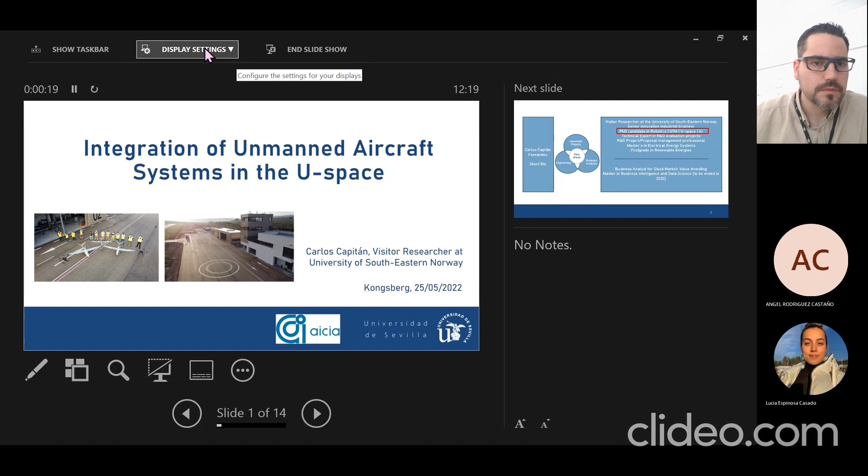As I told before, I'm Carlos Capitan. Right now I'm visitor researcher at the University of Southeastern Norway, a place in Kongsberg. I worked at AICIA, a technological center associated to the engineering school of the University of Seville in Spain.

As a short biography of myself, I have been working more than 10 years in the development of innovation projects in different fields of industry, some renewable energies, electrical matter, also in robotic UTM systems. I have done some technical roles and also management roles in my experience, my background, and the topic of today is the PhD, the doctorate that I have been doing in my last 4 years.

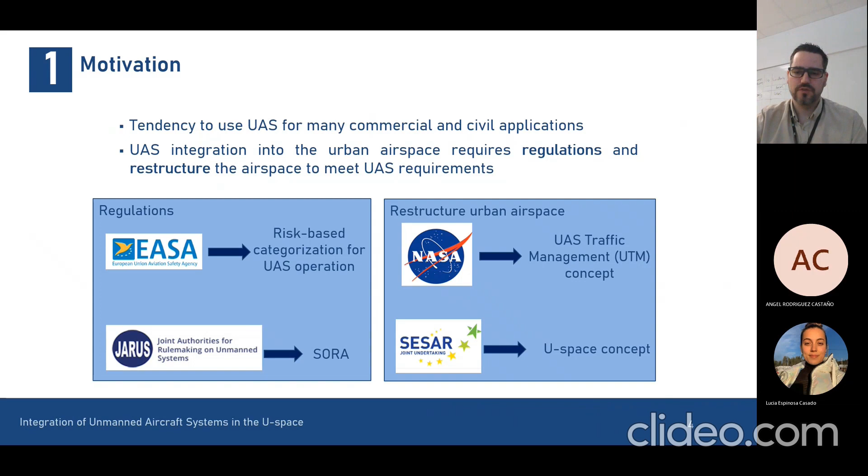Speaking about regulatory framework for UAS as objective, we had the task of studying and applying the regulatory framework coming from the European Commission to get approval for UAS flying in the U-Space. This research was made in the context of the Multidrone project, a European funded project, Horizon 2020.

And the work that we achieved in this research was to make an evaluation of the risk level of an operation - an aerial cinematographic operation to be conducted with autonomous small UAVs.

So we applied the whole process of the SORA methodology that is defined by EASA, by JARUS, as I told before. Here we can see some pictures about the whole process that you have to do in order to accomplish the assessment and get the approval at the end to start flying in the U-space.

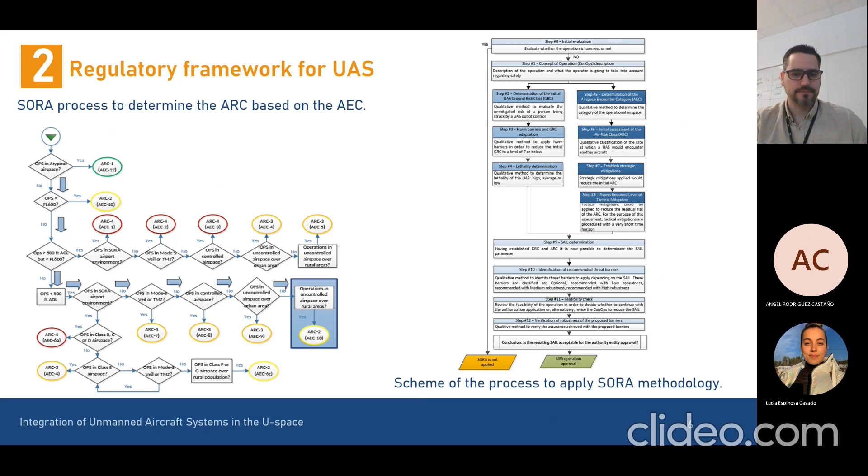The second pillar of our research is based on the development - the objective is building a framework for unmanned aerial traffic management in the context of U-Space. This research was funded and aligned with the European project Horizon 2020 GAUSS.

That it is funded, but it was funded with GSA. The work that we achieved in this research was to develop an open source framework based on ROS as underlying middleware for a UTM system architecture.

And there we developed a UTM with in-flight U-space based services. In-flight services are the services that you need when the drones are already flying.

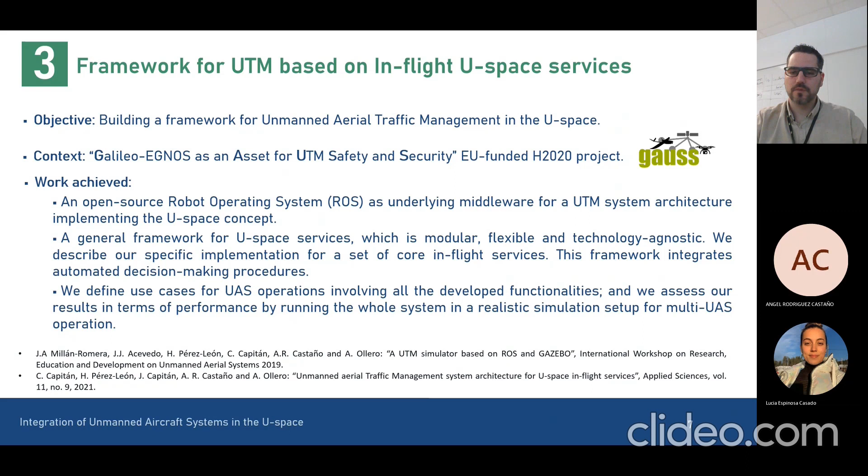Once we developed this software architecture, we tested it by defining some use cases with the UAS operation and running simulations in a realistic environment, one setup for multi-UAS operation.

Here we can see a scheme of the architecture of the U-space. In green are the services we developed: tracking, monitoring, emergency management, and tactical deconfliction. These three blocks are the software modules needed to run the UTM system as a whole.

Outside the UTM system, we have more stakeholders that are part of the U-space ecosystem, such as the drone operator, the drone itself, authorities, and so on. There's also a link to the open source repository where all our software development is released.

At the right of this slide, taking into account a report from Eurocontrol, we show how the overall implementation level in Europe stands for every U-space based service. As you can see, our UTM system addresses services like tracking, monitoring, emergency management, and tactical deconfliction, which have a big gap to be improved in terms of implementation around Europe.

In this slide, we are going to show a video about our UTM architecture system. At the right, you can see the functionality that our UTM system covers.

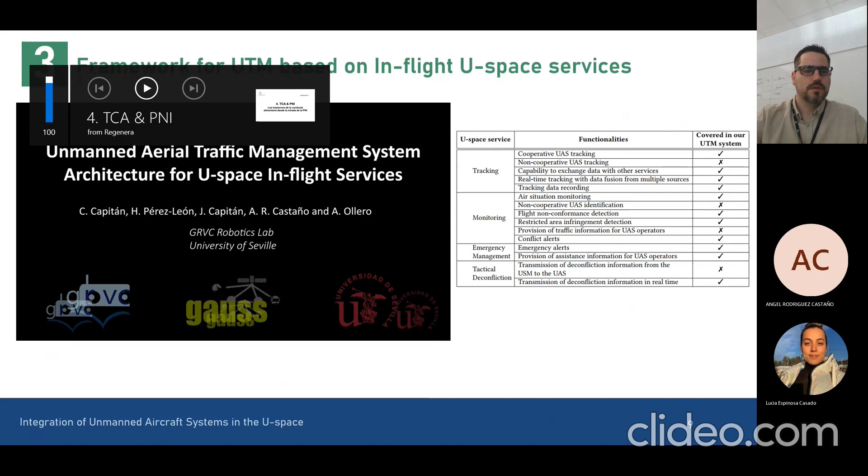Here we can see that we are developing a UTM system to integrate fixed wing and rotary wing UAS in the same airspace. We consider the operational volume, as well as the trajectory for UAS, considering position and time. We develop in-flight U-space based services and have automated decision making during real-time threat management and conflict resolution. We define two use cases that we are going to see now.

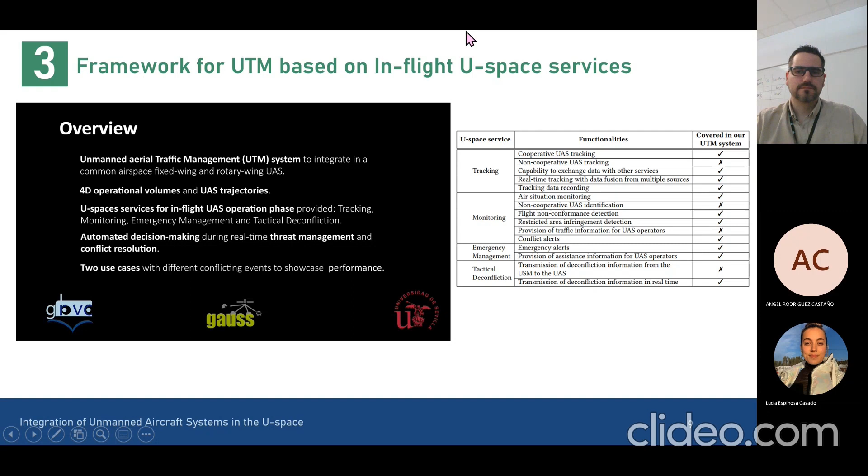The first use case involves one fixed wing drone doing a power line inspection operation, and one multi-rotor drone doing a precision agriculture operation.

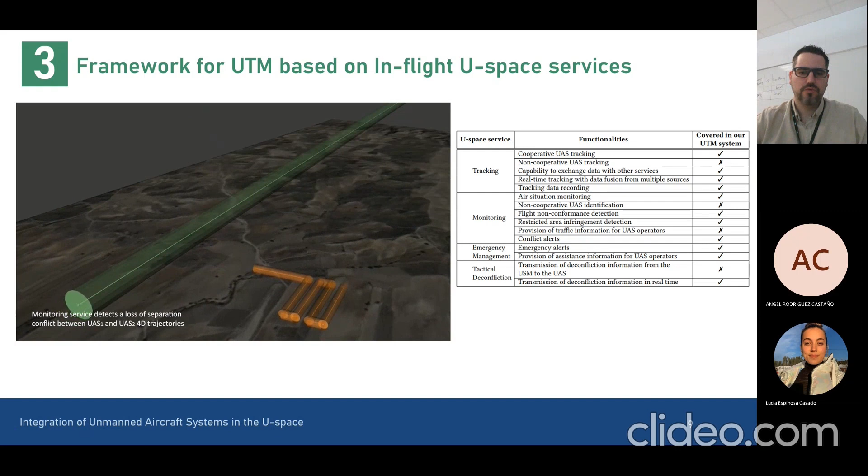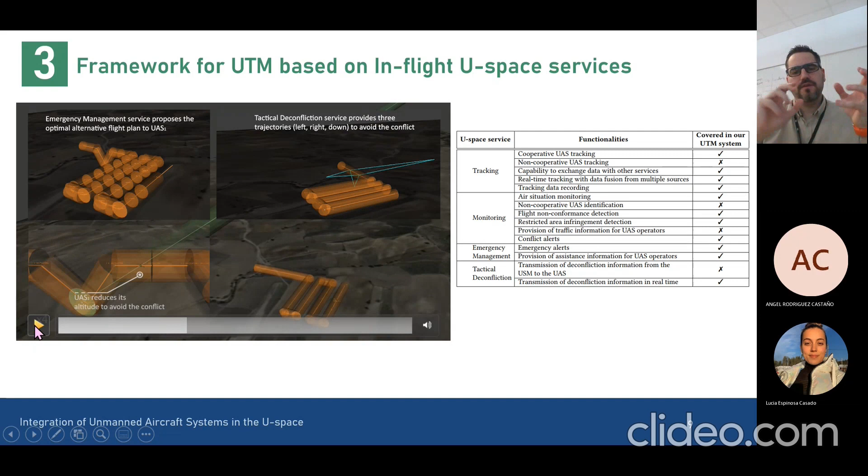UAS2 started on time, but UAS1 delayed its operation start. The monitoring service detects a loss of separation between the two drones. The tactical deconfliction service proposes different options to solve this conflict, proposing that the multi-rotor change its trajectory, because by the rules of the airspace the fixed wing drone has priority to not change trajectory, since the maneuverability of a multi-rotor is easier than a fixed wing drone.

The emergency management service decides what is the most optimal solution to solve this problem. We can see that the multi-rotor avoids the conflict like this.

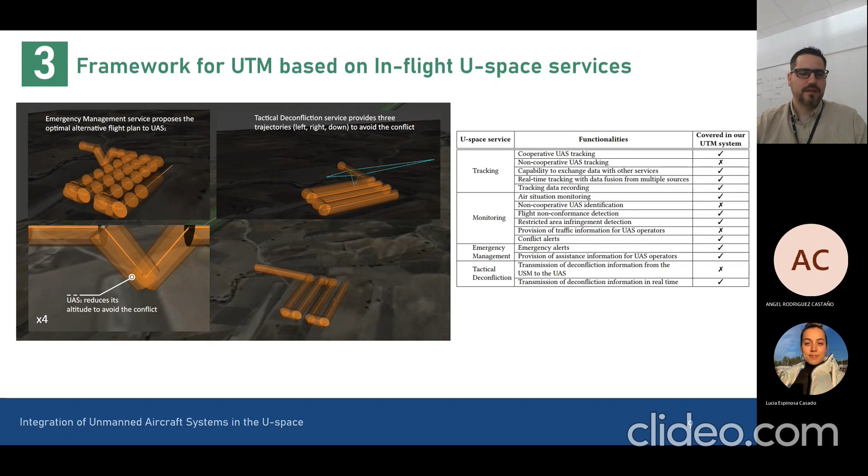The second use case we consider is managing a jamming attack causing a geofence conflict. In this case, we also have two drones: one multi-rotor doing a forest surveillance operation, and another multi-rotor doing a wind turbine inspection operation.

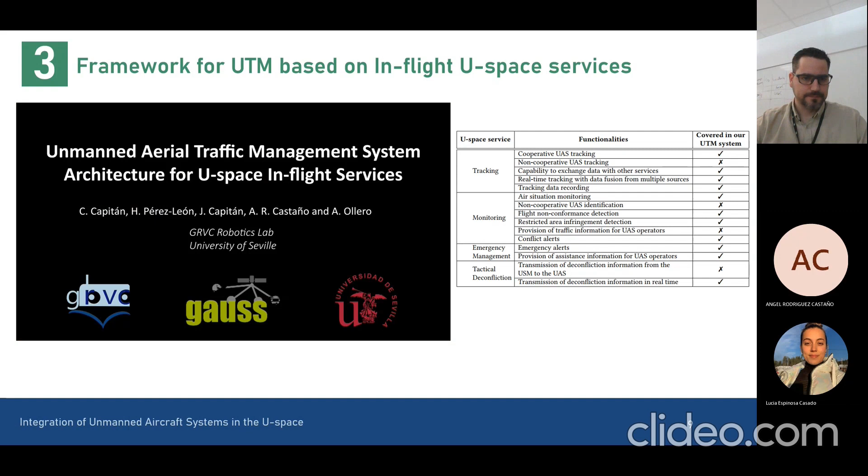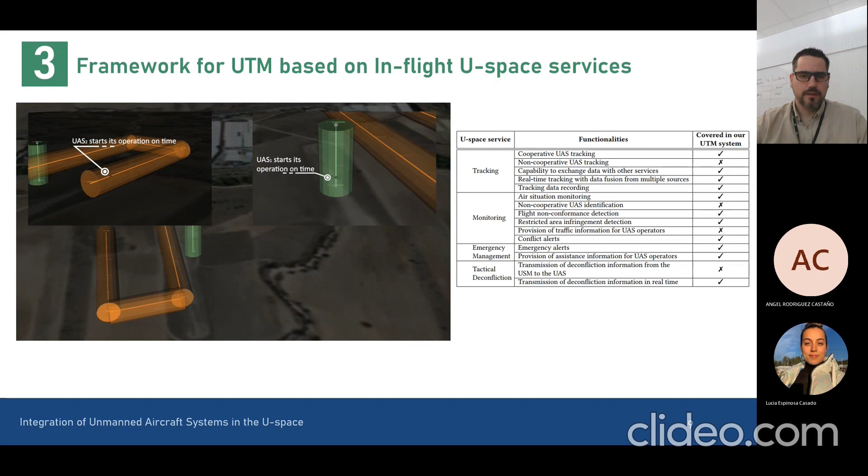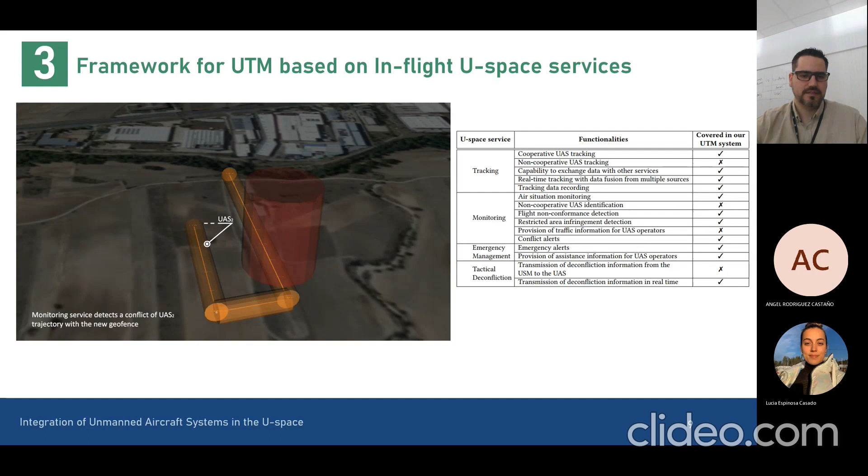At some moment, there is a jamming attack that affects UAS1. The emergency management service decides to create a geofence around this drone, and this geofence affects the UAS2 operation. Monitoring detects that it is affecting the flight, and tactical deconfliction together with emergency management give a solution for UAS2 to avoid the geofence, as we can see.

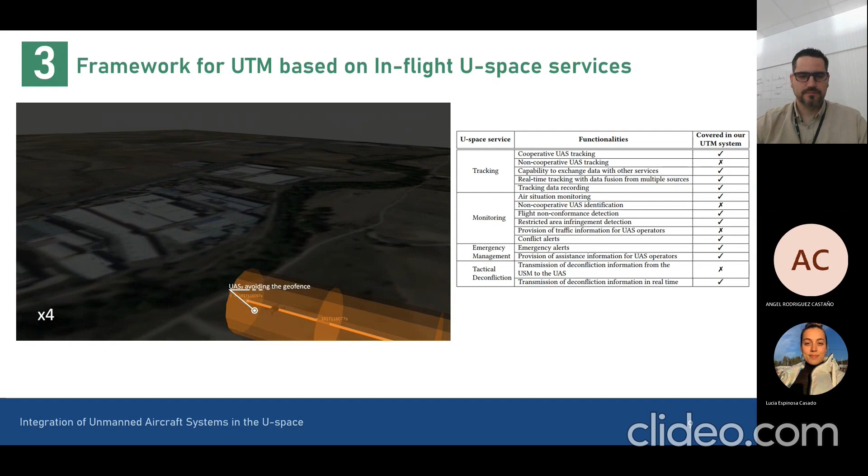Moving to the third pillar of our development: the objective is to build a real-time decision-making method to manage unexpected events or threats, which can happen when several UAS are flying in the U-space. This work has been funded and aligned with Project Gauss, as mentioned before.

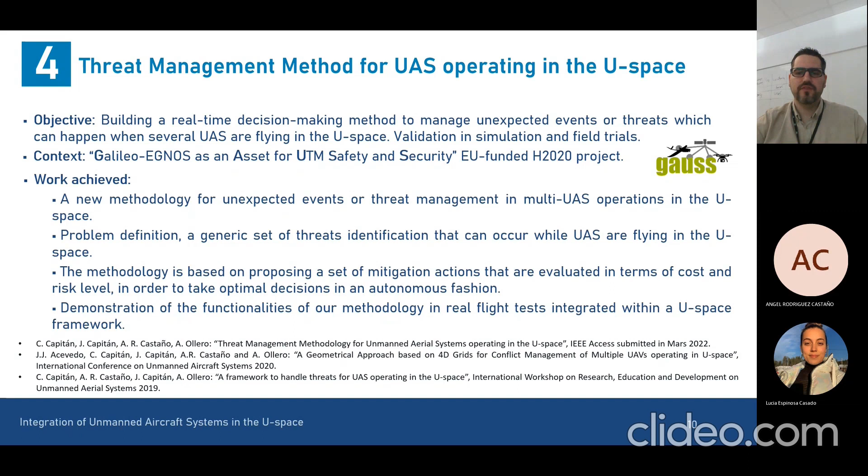In this case, we have developed the method, validated it by simulation, and also validated it in field trials with real drones.

In this figure, this scheme, we can see the different threats that we consider. They are generic threats like a lack of battery, a jamming attack, a geofence conflict, and so on.

The method is implemented in the previous UTM system we developed, specifically in the emergency management and tactical deconfliction services. There are different possible actions to take when conflicts happen; you can see in this scheme the three types of action, along with some restrictions or constraints in the U-space to take into account.

The tactical deconfliction role is to compute all the alternative flight plans that can arise when a conflict appears. For example, we consider these options in table 3, showing different maneuvers used to propose alternative flight plans. Tactical deconfliction considers all these kinds of maneuvers and calculates different metrics in order to give emergency management the metrics of every maneuver, and the emergency management decision-making method has to decide what is the optimal solution for the safety and efficiency of the operations.

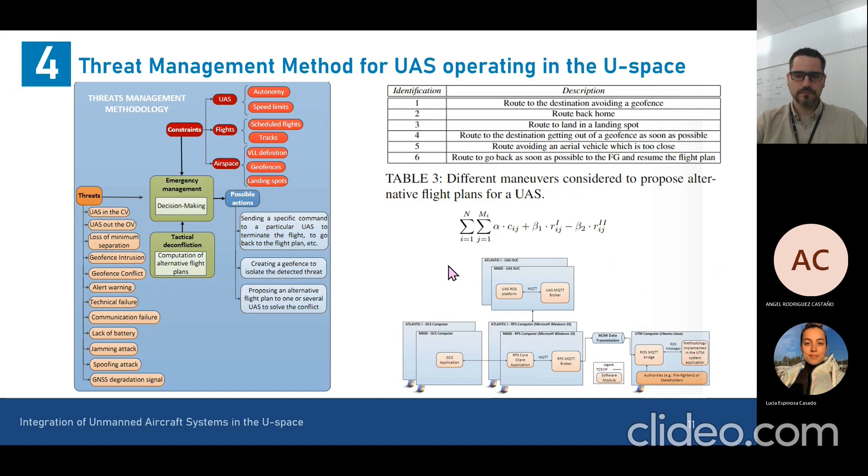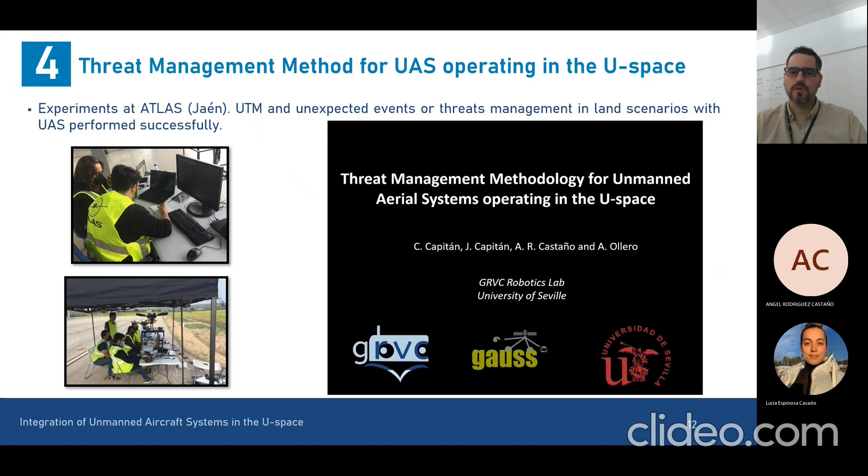As I told before, we validate our methodology of threat management in simulation and also in experiment at Atlas, placed in Villacarrillo, Jaén. It's a segregated airspace for UAS operations. So we can see here a video about the result of our experiment there.

As overview, as I told before, we identify and classify generic threats in U-space. We developed our method to handle this threat, taking as a base our in-flight UAS UTM architecture, specifically emergency management and tactical deconfliction services. And we make automatic decision making in real time when the UTM is running.

We put semi-automatic decision making because at the end, for regulatory restriction, the pilot has the ultimate decision of accepting an alternative flight plan or not. Also, in this method, we are considering four-dimensional trajectories and volumes, and we define 3 use cases to prove our concepts.

Use case 1 is a violation of the safety distance between 2 operations. The first operation is a fixed wing UAS that starts on time. The second operation is a UAS, a multi-rotor, that starts with some delay. So due to the delay, some conflict appears between them. There is a violation of the safety distance.

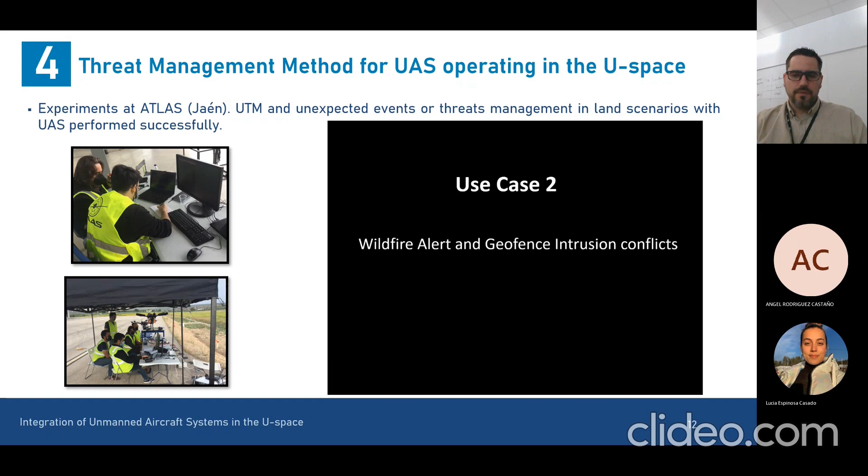Then in the second use case, we have an operation of a wind turbine inspection with a drone that is notified of a wildfire close to this drone. Okay, so a geofence is going to be created.

There are two possibilities in this use case to solve this conflict: land in one of these landing spots. So tactical deconfliction and emergency management have to decide what is the best option.

We can see how the drone leaves the geofence.

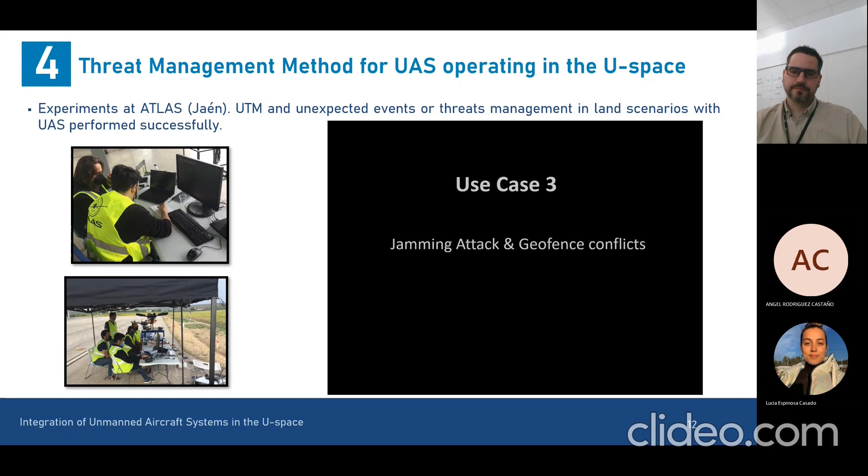In this use case, there is a jamming attack to the multirotor and the fixed wing that is doing an operation at high altitude, avoiding the geofence created by the UTM system.

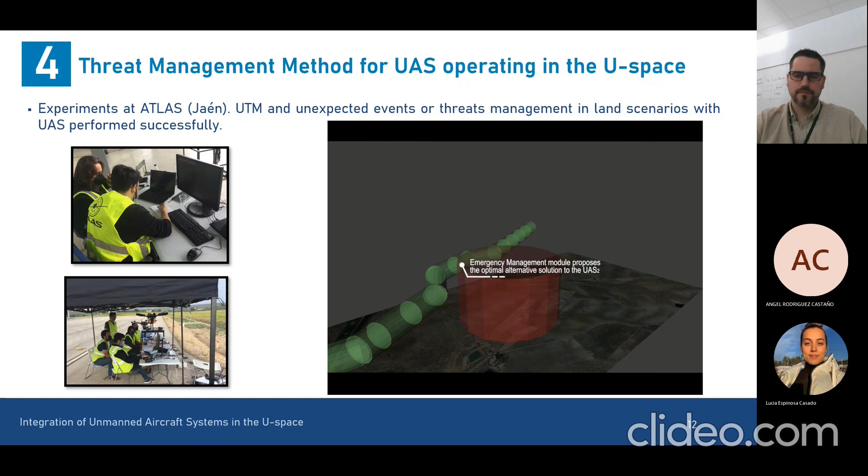As a summary, we were presenting the outcomes of the Gauss project and how, in this slide, I'm trying to show how the knowledge that we got from the Gauss project is transferred to the USEPE project. USEPE project is urban separation management. Well, the name USEPE stands for U-space Separation in Europe.

So in this project, a new concept of operation approach is defined, called the dynamic density corridor concept. It's a new concept of operation trying to simplify how to operate in densely populated areas such as cities with multiple drones.

Secondly, in the USEPE project, we are integrating some systems. We are using an open source ATM simulator, Blue Sky, and we are doing simulations with this ATM Blue Sky simulator.